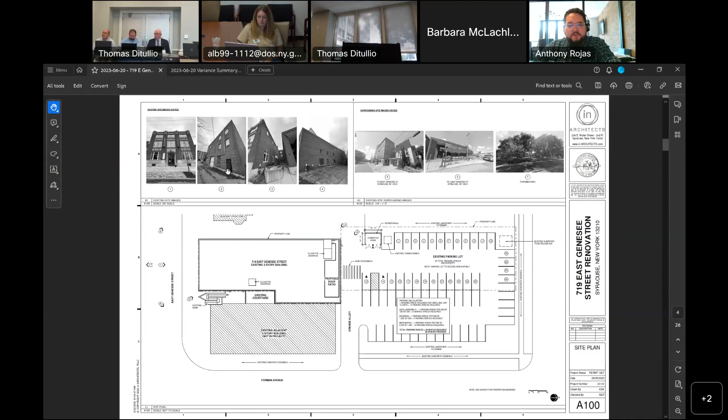We have the applicant here, Mr. Rojas. Would you like to state your name and address, and give us information on your project and what you're seeking relief for? Sure. Good morning, everyone. My name is Anthony Rojas. I am principal here at In Architects, representing Foundation Housing for 719 East Genesee Street. We have submitted drawings that show that our existing, there's an existing 3-story structure. The property line is right on the building's exterior facade, so there is essentially a 0 lot line structure on all the way around our building.

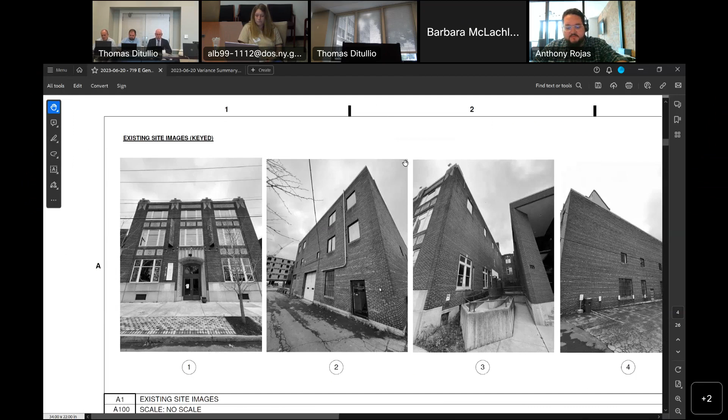As I zoom into some of these pictures here, you'll notice that the 2 walls in question in which we're proposing additional windows currently have existing windows along this facade. This is the western elevation. These are existing windows along the western elevation, and we're proposing to increase the percentage of opening window area by 1.8% along this western elevation. This photo shows the eastern elevation, again with existing windows, and this area also has a 0 lot line along the property line. This east elevation, we're proposing a 0.6% increase of window area.

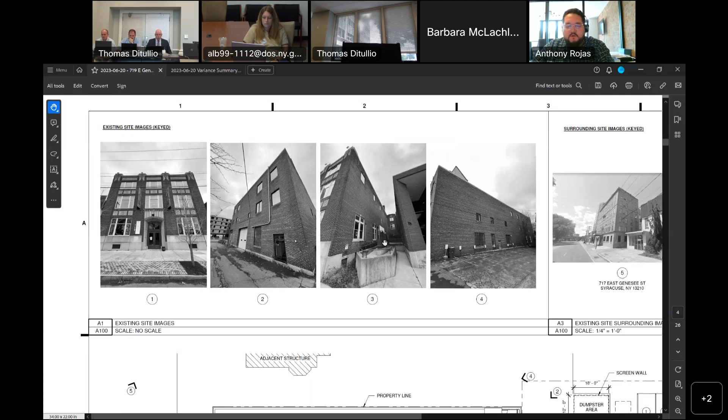The windows that are proposed are specifically for the residential units proposed on the interior and redevelopment of this project. It would be mostly into shared living and kitchen areas within these new bedroom layouts or within private bedrooms themselves, which would otherwise create a hardship in being able to lease these spaces to new tenants without natural daylighting into this proposed use. So we're requesting permission to increase the amount of openings.

The building is fully sprinklered, and the system will be modified. We will be adding additional sprinkler heads over each window along the exterior to add an additional layer of protection for these new openings and existing openings along the east and west elevations, to protect themselves from any adjacent structures.

The second item, I don't know if this is something we can speak about today, but in response to the letter Brian Thompson provided you on behalf of the city of Syracuse, he mentioned a second item that, if you'd be willing to listen to, I'd love to offer some additional information on.

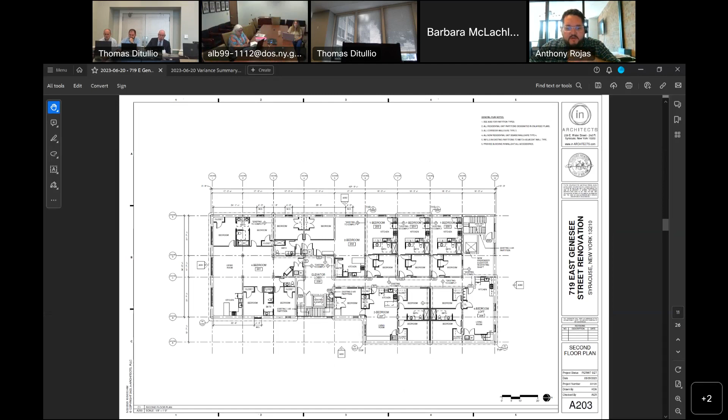He had a question about one of the existing stair openings. We have 2 stairs. One is the existing stair on the back, which is fully enclosed and meets all levels down to grade, so that's not in question. The question he raised is about this stair that wraps the elevator. You'll notice it currently has doors on closers that separate the stairs from each level, but once you land on the level below, it opens up to the elevator lobby where the existing elevator is located. So you essentially have to leave the stairwell to then go back down to enter the staircase again.

In the sections he noted as the issue, existing building code 1011.4, if you read through it, it refers back to chapter 9 and then down to chapter 8, section 802.2.1. We meet all the exemptions under item 3, where this enclosure shall not be required because we provide the building with an automatic sprinkler system, we exit on the lowest or next to lowest level on the street floor, and the entire area is open and unobstructed in a manner so that it's reasonable to assume there's a fire in any part of the interconnected spaces. So all 5 items in that section we meet as an exemption, so it doesn't necessitate a complete enclosure all the way down to the ground, based on the existing building code.

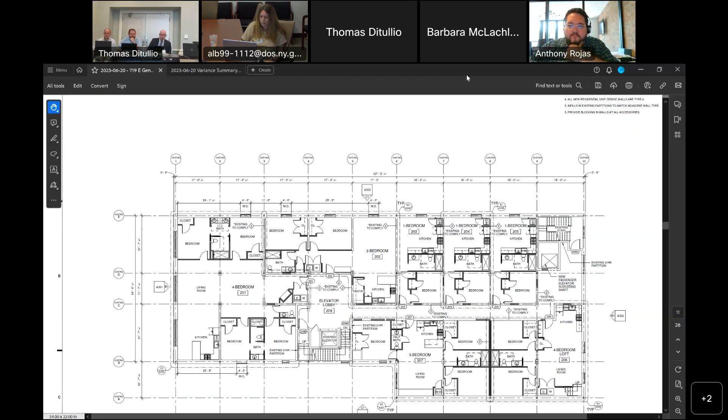Generally, when looking at existing buildings, we want to be able to reutilize existing buildings. The code prioritizes that versus new buildings. Part of that premise is that we're not going to either increase areas of nonconformity or make the building less safe. So it's your argument that by...

Replacing the sprinkler system and making the windows inoperable, that you're saying that makes it as safe as it currently stands or safer? Yes, the windows will be inoperable, and we will be adding additional sprinkler heads right over the openings in case of any incident that may occur. That'll be an added layer of protection because there currently are no sprinkler heads over the openings.

Are you addressing, as part of it, the code requirement for windows providing light for residential units and fresh air? If we're going to have inoperable windows, are you addressing ventilation that brings fresh air into the building? Correct, we'll be adding a makeup air unit that allows fresh air intake into the building so that we don't need the windows to be operable.

Have you spoken to the adjacent property owners? We have, and mentioned the reuse of the building and its proposed new life. They've never raised a question. One is actually a structural engineer we've worked with on other projects throughout the city, so he never expressed any issue, even when we mentioned the new openings. We also have a structural engineer to our west and MEP engineers to our east, right adjacent to us on either side, and neither have expressed any issue with the redevelopment plans of this building.

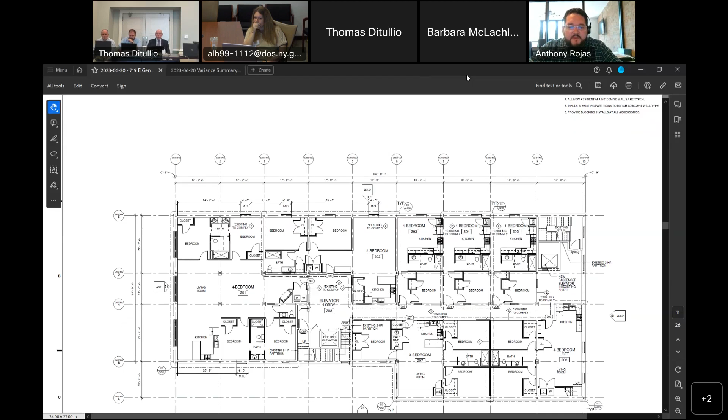Any other questions for the applicant? Mr. Garlock, do you have any questions? So the windows are technically not code required for any purpose, correct? The additional windows that you're installing. So we would need daylighting into the units, especially those one-bedroom units, into any kitchen and living area. We'd want daylighting into those units, but by code, I don't think that we do.

It would just create an issue in leasing those spaces and having them be viable without any natural daylighting. What happens in the future should the adjacent landowners on either side want to build up to the party wall with a code compliant structure, without any agreements or easements in place?

So the existing owner understands the possibility of that happening and the possibility of losing those windows at some point. Any developer in a downtown type of condition would understand there's a risk in doing this, but they are willing to take on that risk and allow for these windows to be installed as long as they can be. If there's a need to shift in the future because there's a new project proposed next door, then she would obviously take care of the issue at that point.

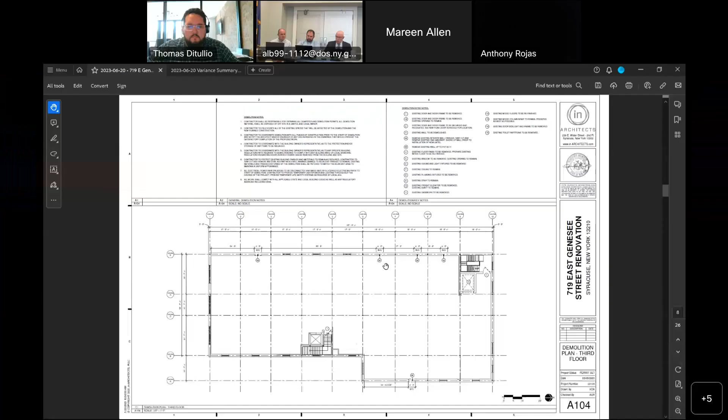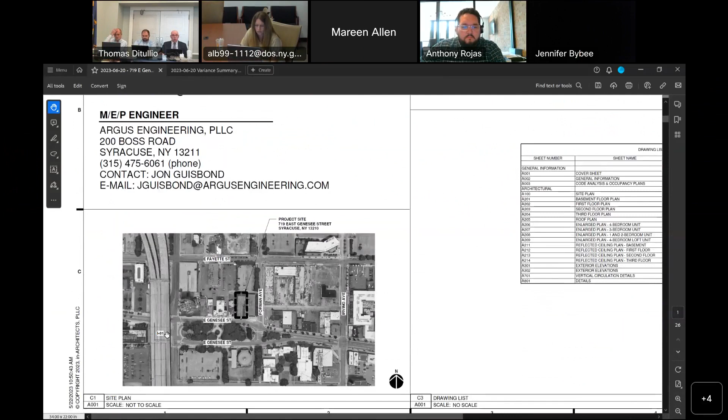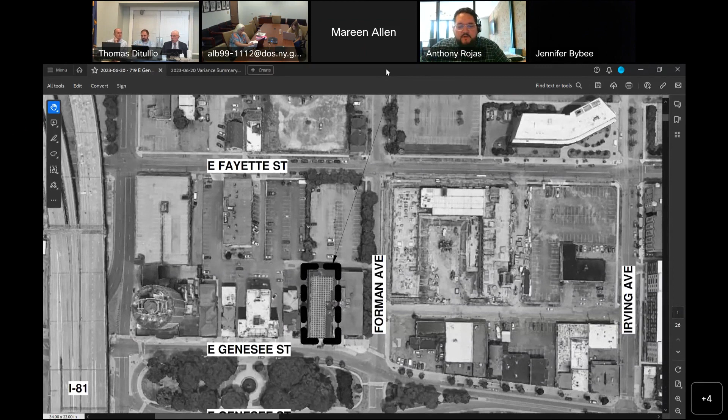On the east side, they will have to get an easement for the exiting. Yes, that would be chapter ten, and the property maintenance code both require access to the public way. Mr. Rojas, are you in the process of establishing an easement? Yes, they're in communications to see if they want to establish an easement or have some kind of 100-year lease agreement or written agreement continuing the understanding that both utilize that area. Both buildings use that area for handicap accessibility and for egress. Both parties are aware and in communication, and will come to some agreement. They're just trying to legally work that out between both legal entities.

So what about the west side? Have you attempted to establish an easement with the adjoining property? No, we have not attempted that pathway or requested that of the current building owner. It is on a zero lot line. The east side is easier because of its previous use and the understanding between both parties. The west side, we feel would create a burden on that current property owner by narrowing their site even further. So our current property owner is the one willing to take the risk, understanding that if there were a future building proposed, they would have to deal with the windows and how many there are, and potentially even closing them at a future date.

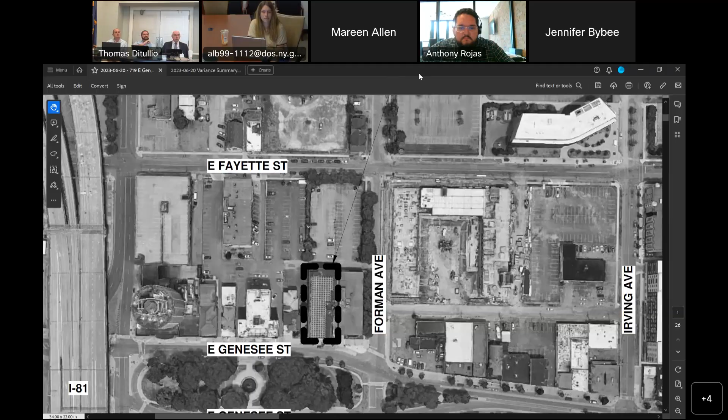We just changed our zoning ordinance as of the first, so I apologize, I'm not up on it yet. I believe there would be no setback in that district, though. I could be mistaken, but it's my belief there would not be. I can tell you what was proposed about two years ago was a 19-story building that was 3 feet from the property line.

What percentage, let's just stick on the west side, I think that's the most common concern here. I mean, the existing condition is what it is, but the applicant's investing a lot of money to rehabilitate this building for housing. In a matter of 3 or 4 years, it could all be lost if there's another development proposed on the zero lot line.

So the question comes back to: what's to prevent it? We know what the new property owner's gonna have to do if they build on zero lot line, they're gonna have to build a wall that's compliant. And yet we're putting this situation in financial and community jeopardy, that people may have to be relocated who are residing in this building because it no longer meets code, because the windows have to be closed up, or they would exist but they'd be looking at a brick wall.

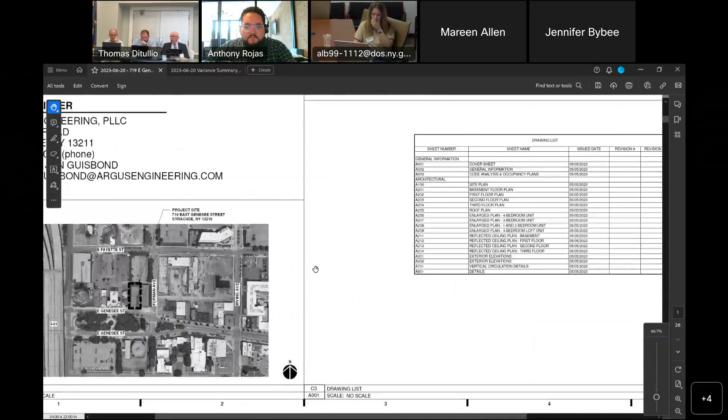So there are - I could pull up the third floor. Drawing A204, it's like rooms 303, 304, and 305. Those are new windows. Allow me to pull that up here. Third floor.

So this new window here that's into the bedroom, I can get away with not having that window there. But this one-bedroom unit here, these windows here are into the kitchen living areas on each of these.

What I'm highlighting is that - correct me if I'm wrong, Mr. Parsons - but I believe one of the leading fire risks in a residential use is usually the kitchen, something that goes wrong in the kitchen, either oven or cooking something. As far as a risk to an adjacent building, that's probably a higher risk versus if that was a bedroom.

From your design perspective, I understand exactly why you want the windows and why they make sense where they are, and I share the concerns on that west side - we have to be careful. You look at your building, we all have to be good neighbors. And so...

If the city of Syracuse now permits that adjacent building to be a zero lot line building, I'm not sure we have the authority to inhibit anything on them. They're not the applicant. That's not our role, to look at the neighbor and say well now they can't, because we permit this. So we can only regulate on this side of the property.

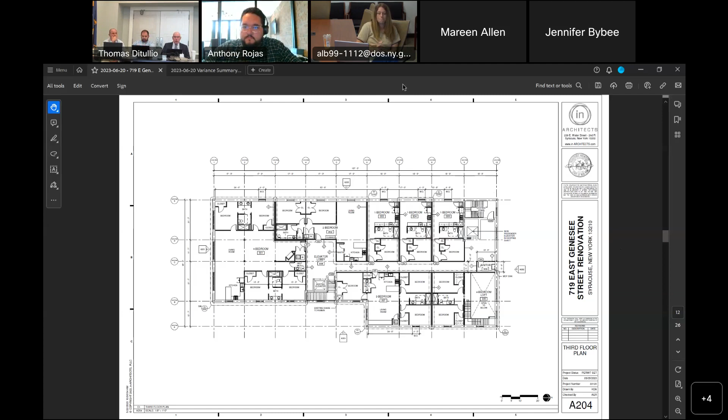I don't have anything further. All right, so we're going to go into recess while we do some deliberation on this. We just ask folks to leave the room, and we will be going off the record to begin deliberation. Off the record. Thank you.

We can go back on the record. We're on the record, thank you. We're out of recess, coming back to continue a conversation regarding petition number 2023-0335 regarding 719 East Genesee Street, Syracuse, New York, Anthony Rojas of In Architects LLC.

To begin with, the board's comments, this is for Mr. Rojas. We're, as you can tell from the questions, struggling with this whole opening issue on the west side without easements. I think if there were easements, we could deal with a zero lot line. It's just we can't come to any agreement on how this could be done with a mitigation that doesn't create a greater hazard to the building and to the occupants.

So the choice for us right now is, since you're in design, do you want to go back and take a look at this and then come back to us on the same application, or we can make a determination and then you can respond back and do a second application.